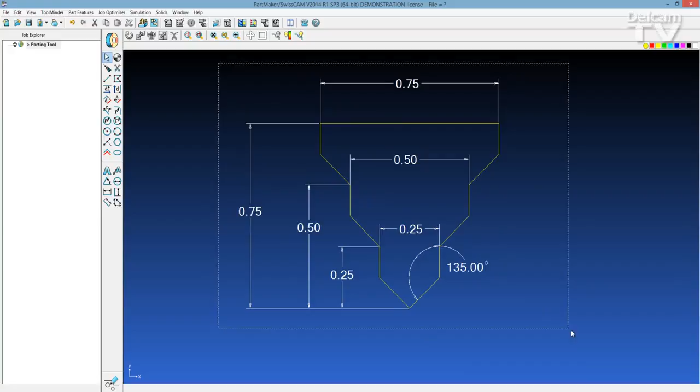Here we see a drawing of the tool in PartMaker CAD. You see the tool has already been drawn and dimensioned here. However, let's quickly delete this and show you an exercise of drawing up a form tool like this one based on the dimensions provided in the drawing. We'll start by selecting the line parallel to the vertical axis icon, and we'll specify all the dimensions of the diameter of one side of this form tool.

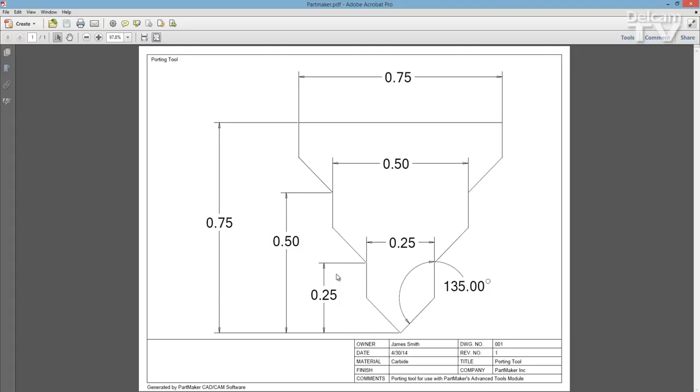So first I'm entering a diameter of 0.125, followed by a diameter of 0.250. Again, we're going per side, so it's half the overall diameter that we're entering because we're only drawing one half of the tool at the moment. And finally to 0.375. Looking back at the drawing of the tool, I see I've got my various lengths of 0.250, 0.5, and 0.750. So we'll quickly draw those in as well using the line parallel to the horizontal axis icon. Again, 0.25, 0.5, and 0.75.

Having now done this, we're going to start to draw in some angles for the drill points of the porting tool. So I'm going to choose my line and angle icon. We'll start at 0, 0 and accept that, and similarly create a line on an angle of 135 degrees. And we'll simply repeat this operation for each subsequent diameter of the porting tool. Having done that, what's very important now is to make sure we create a center line for this tool. And you'll see why we do this in just a moment.

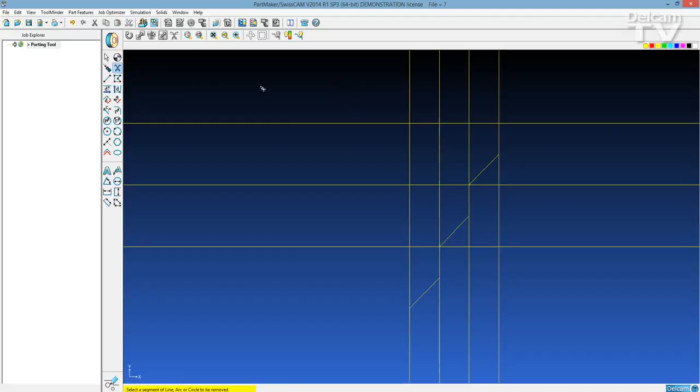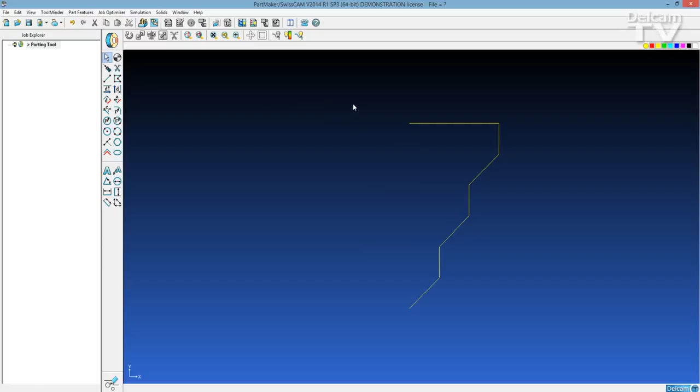So having done this, I'm going to simply clip away all the geometry I don't need, just using PartMaker's remove icon. And finally, I can just get rid of that initial center line. Now, the very important point when we're creating a form tool that's going to be a rotationally symmetrical tool, or a tool used for milling or drilling applications in particular in PartMaker, is to mirror the geometry. So I'm going to select this geometry, select the mirror button, making one copy on a vertical axis and simply mirroring the geometry.

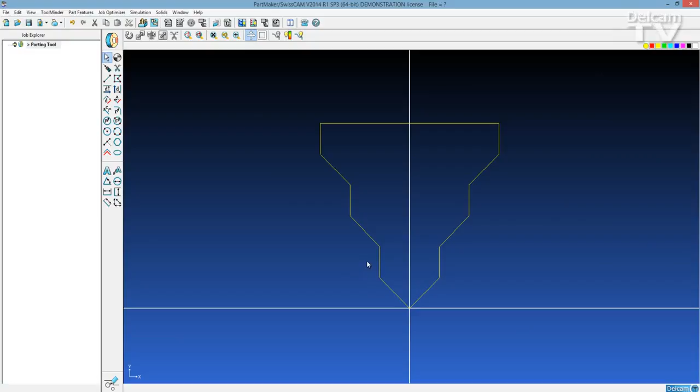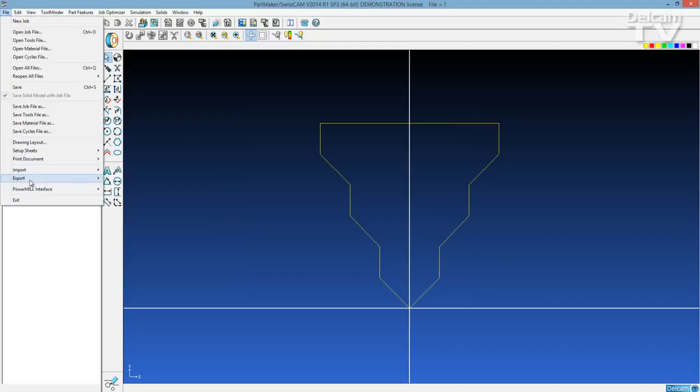So here's the key: making sure you have closed geometry which is symmetrical about the axes in the part. As a general bit of guidance, I always recommend creating a form tool like this in a window like the Mill XY plane if you're using SwissCAM or TurnMill. If you're using PartMaker Mill, you can use the same window also. But really, you can do this in any of the PartMaker windows. Having drawn the tool, I'm now going to export it as a DXF file, and I'll call it port_tool.dxf.

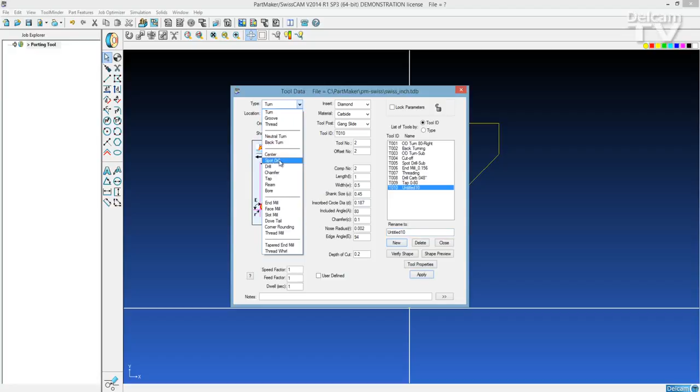Now, keep that tool name in mind because we're going to go into PartMaker's Tools database. We're going to create a new tool and choose the type of tool that it is. Of course, this is generally a drill, which is oriented in the X longitude. And I'm going to tick this button called User Defined. This is what tells the software I'm using a user-defined tool. At this stage, the real key is to give the tool a name that is identical to the DXF file. So here you see I'm giving the name port_tool.

At this point, I can also set up some of the parameters that are roughly equivalent to the tool. For example, the length of 0.750, the diameter I want it to be recognized by, let's say 0.250, the included angle of, let's say, 90 degrees. Really, what the software is going to do is look at the geometry you've drawn to create this tool.

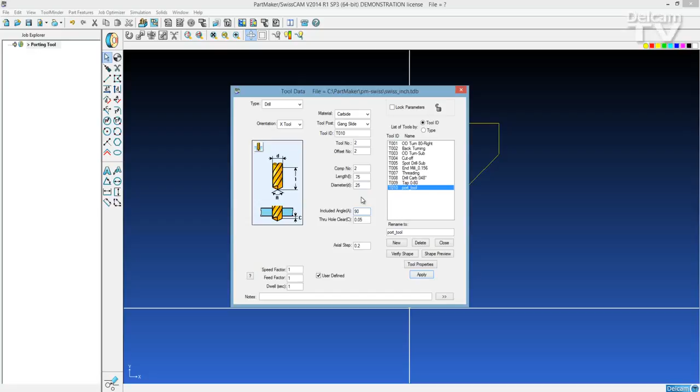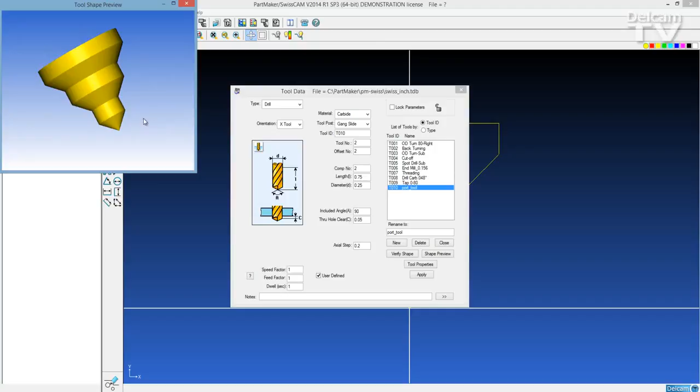So now when I click on this button called Verify Shape, there I see the actual shape that I've drawn in PartMaker's 2D CAD and brought into my tool database for use as a form tool. When I do a shape preview, I now see that 2D geometry having been revolved, and I see a 3D model of that form tool. So that's a very quick lesson on how you can create custom form tools using PartMaker's Advanced Tools function.